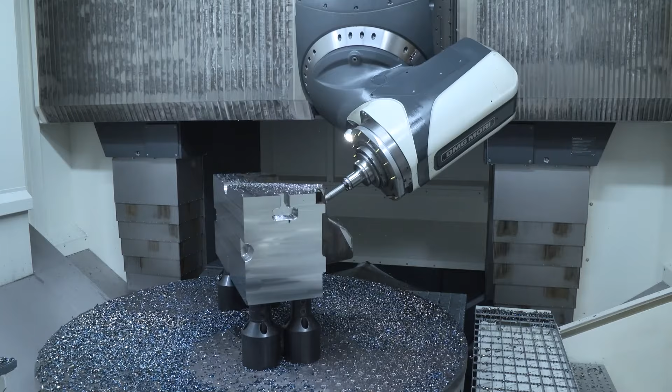As part complexity increases, your manufacturing department is under constant pressure to deliver safe and reliable CNC machining programs. Complex, high-value parts often contain features and details which cannot be produced using 3-axis machining alone, which is why Autodesk Fusion 360 can create multi-axis operations to fully utilize the capabilities of your machine tools.

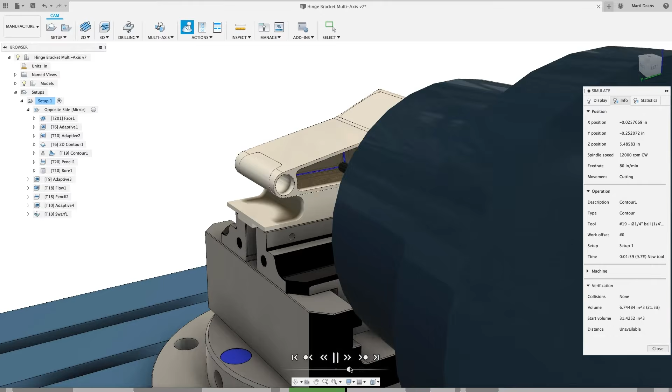The process begins by checking the part. Accessibility analysis shading creates a quick, visual reference indicating whether or not a part can be fully machined from a single direction. This speeds up the decision process on how to orient and fixture your parts ready for machining.

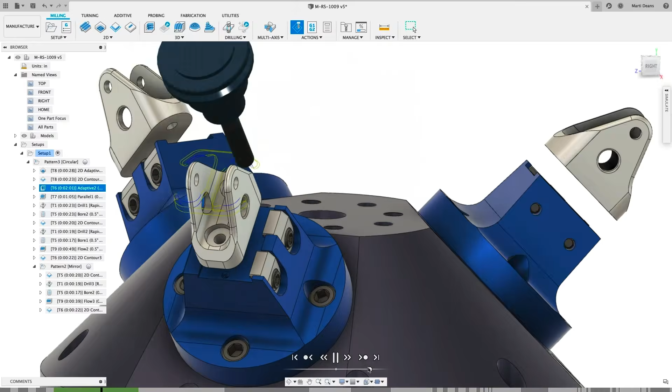To reduce the cost of fixturing to produce parts in fewer setups, multi-axis positional such as 3+1 or 3+2 machining can be used. Toolpath directions can be rapidly selected and calculated with efficient patterns and ordering options for multi-part machining on tombstones.

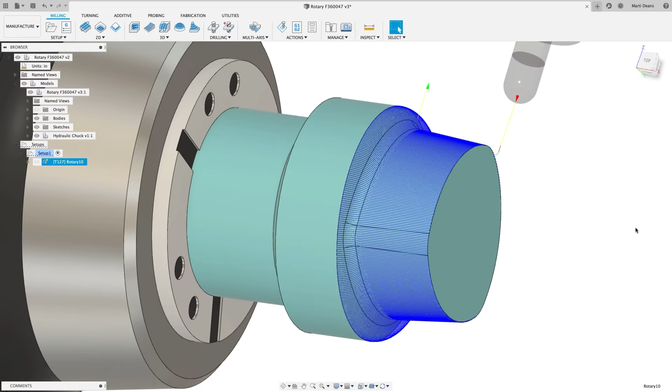To address 4-axis machining, such as a bolt-on 4th axis or turn mill machine, there is 4-axis rotary capability. This allows full 4-axis simultaneous machining of freeform shapes with multiple pass options to best suit your geometry and the ability to set angular limits and offset the tool to improve cutting conditions.

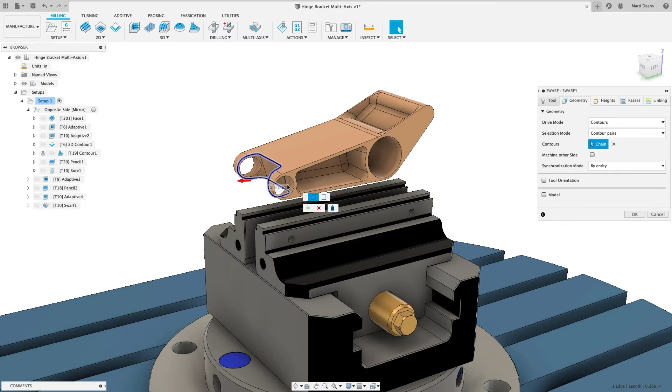For the most complex parts, there is full simultaneous 5-axis programming to allow the use of shorter, more rigid tools which reduce vibration and improve the surface quality of finishing operations. A selection of toolpath options are available, with a range of tilting methods such as lead, lag and sideways lean to improve surface finish, as well as the ability to cut with the side of the tool to take advantage of its full flute length.

Extending this further, Fusion 360 has automatic collision avoidance. Parts can be programmed using a primary tool direction, either vertical or from and to a point or curve. In the event of a collision being detected between the part and the tool or holder, the tool is automatically tilted away from the part, removing the collision.

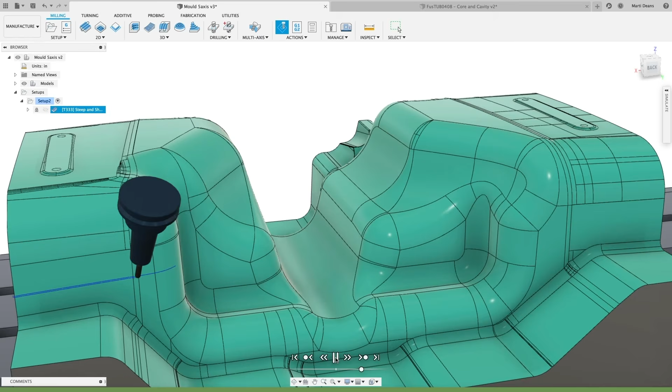This is enhanced with intelligent smoothing to help avoid sudden and erratic machine motion, and tool axis limits to control how far the tool tilts. And with the ability to simulate the toolpath to provide confidence in your programming, and access to a vast library of free, customizable post-processors, Fusion 360 gives you the tools your manufacturing department needs to deliver multi-axis parts.